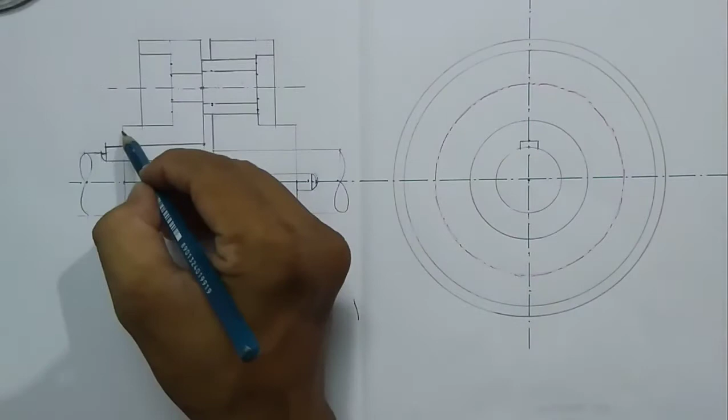Next thing, you have to fillet it here at 4 points. So you can see a small fillet at these 4 points. All fillet and round radii were given as 2 mm. All unmentioned fillet and round radii, 2 mm we have to choose.

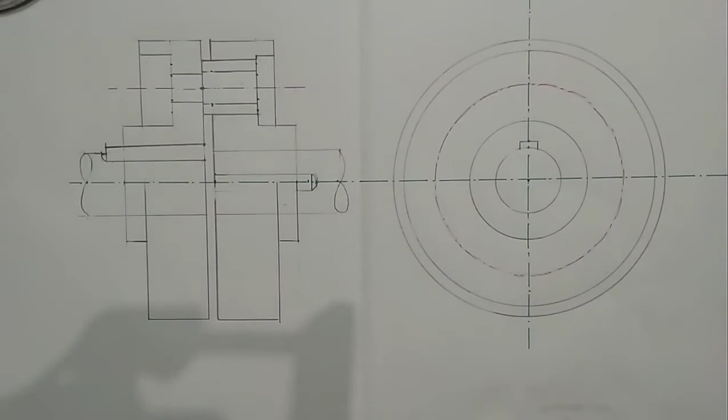So you choose a 4 mm diameter circle, so the radius will be 2 mm. This circle, sorry, this one.

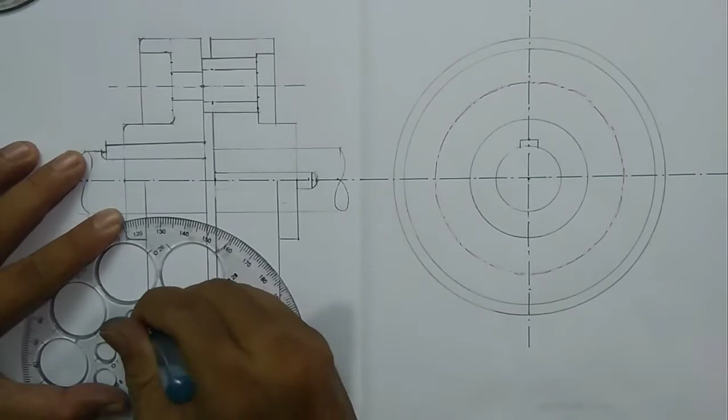Similarly at the bottom. Like this in this flange too.

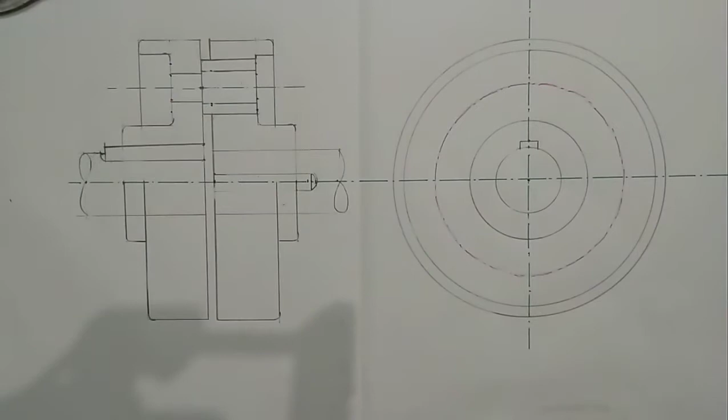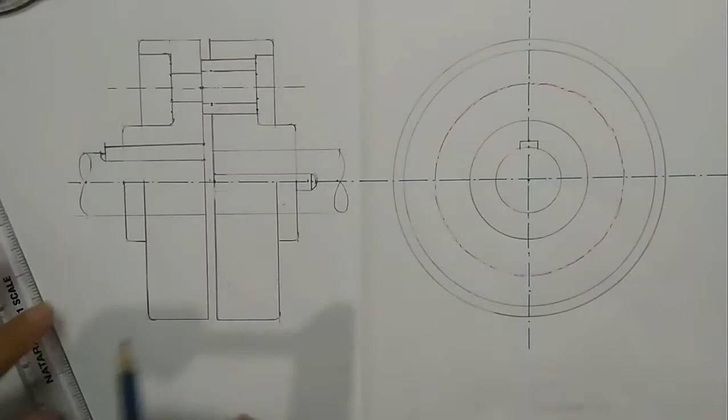So next one is you have to draw this bush at 4 points: here, another one here, another one at the middle front, and another one at the back. So now I am going to draw this center line here. You can see this pitch circle diameter is 90. So from this to this point you will get 45. So I am going to draw the center line 45 mm below the main center line.

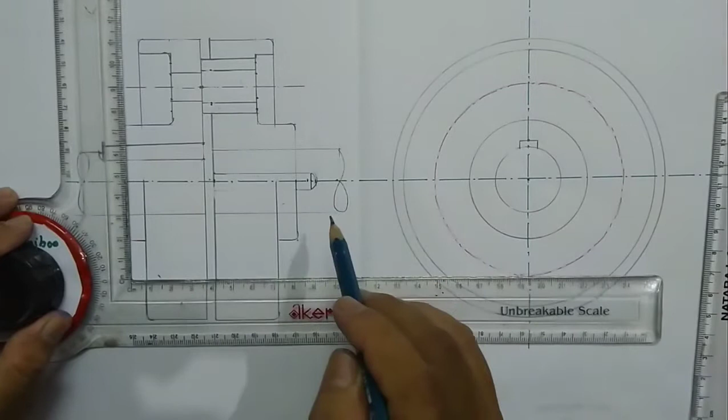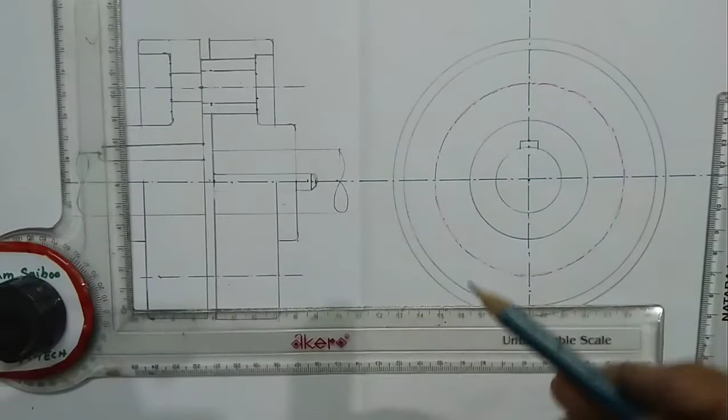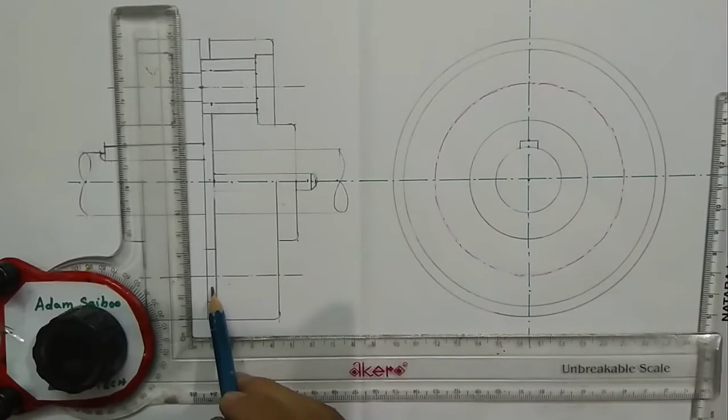You can see the outer diameter of the bush is 25. This distance is 25 mm. So 12.5, 12.5. From here I am drawing the line 12.5 and here 25. So this one is the second bush. Only this portion will be visible because we are not sectioning at the bottom.

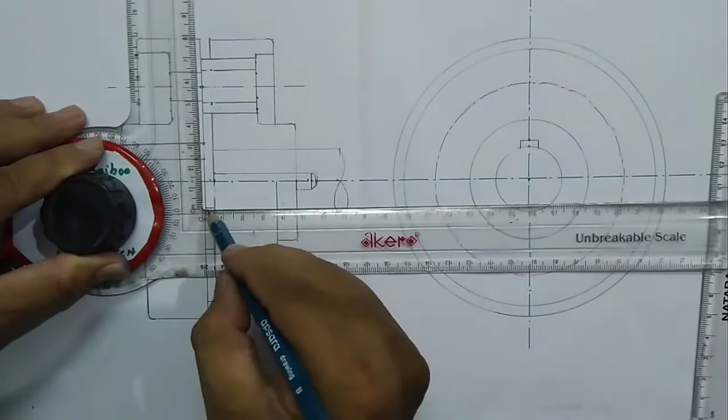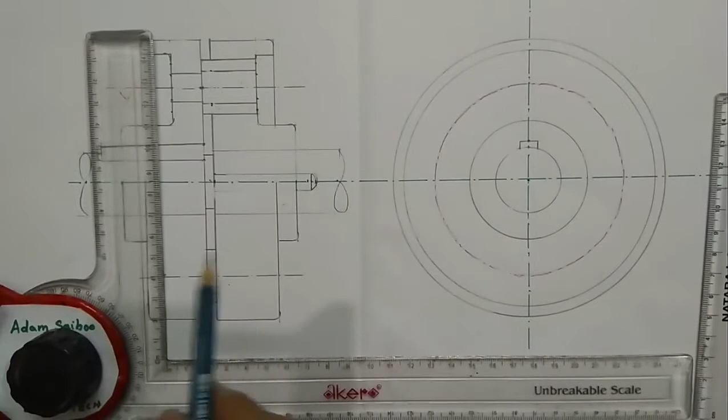Similarly, at the middle, from the center line, draw a small line to fill the gap, 4 mm gap, 25. So this distance will be 12.5. This distance will be 12.5. Another bush, these 3 bushes, one more bush will come at the back, so no need to draw that, it will coincide here. Okay.

The next part will be our hexagonal bolt and nut. This one is a stepped bolt and nut we have to draw. So before drawing this, you have to draw the side view, then only we can draw this bolt. So for this side view we will come here.

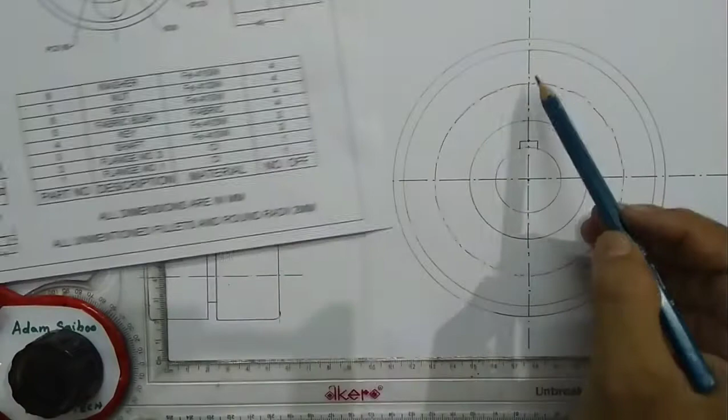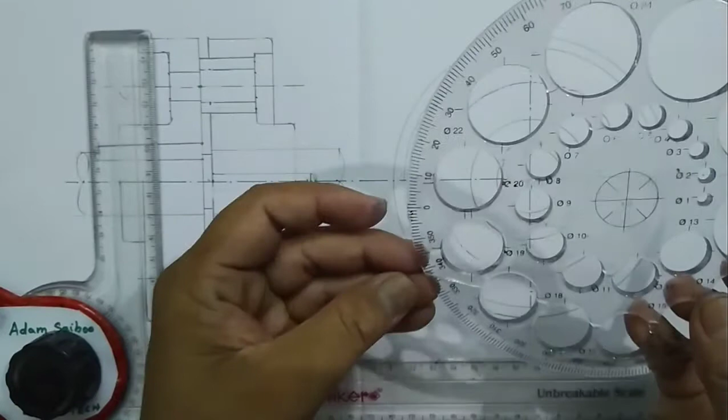So you can see this bolt size was given from this to this point as 21.10. So choose a circle 21.10. You cannot get this diameter circle, so I am choosing a 22 mm diameter circle, approximately equal to 21.10. Draw this circle very light, and at this point also.

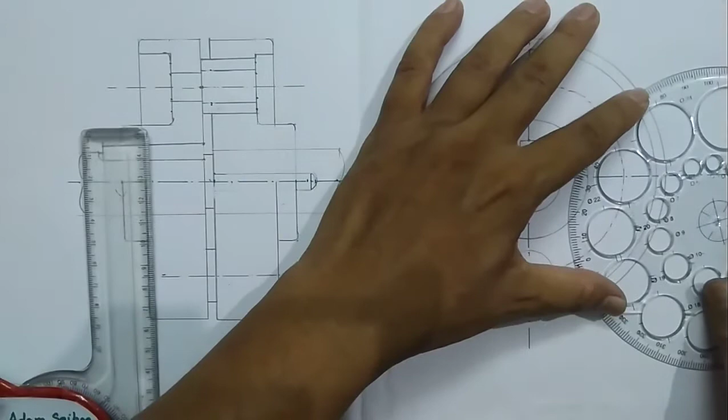So we will get 4 bolts and nuts here. As I am drawing the left side view, we can see the bolt. From here I can see the bolt.

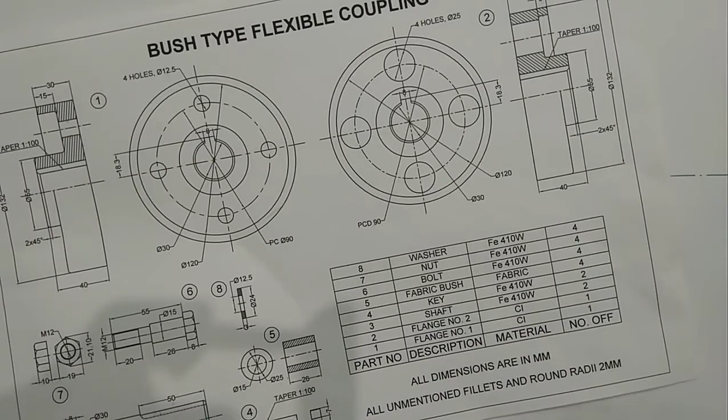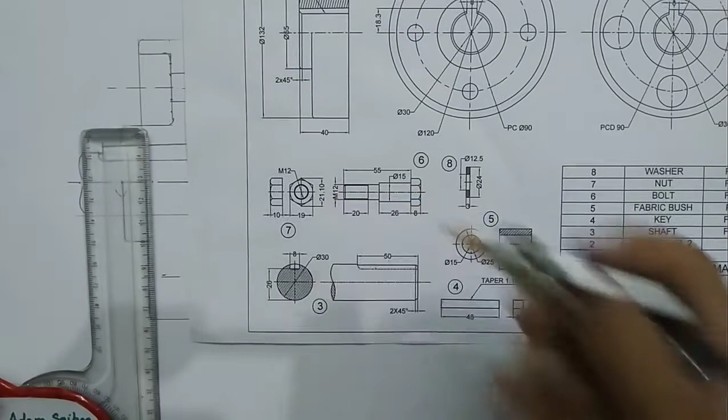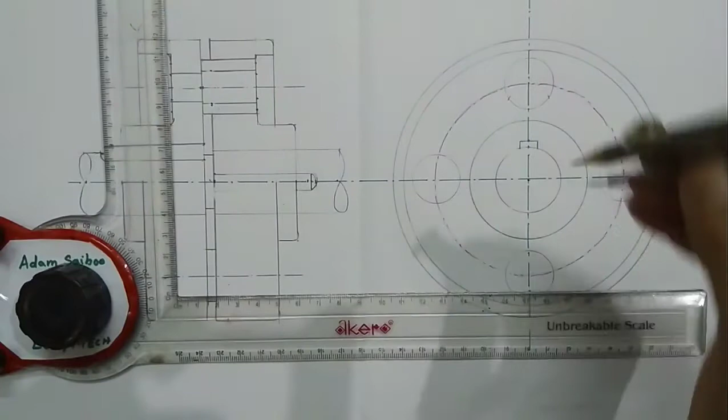So the next thing is I have to draw an arc of size half of this size, 21.10. Half of it is approximately 10.5. So measure 10.5 and cut an arc here. So I am taking 10.5, approximately half of the value of 21.10. Draw the hexagon.

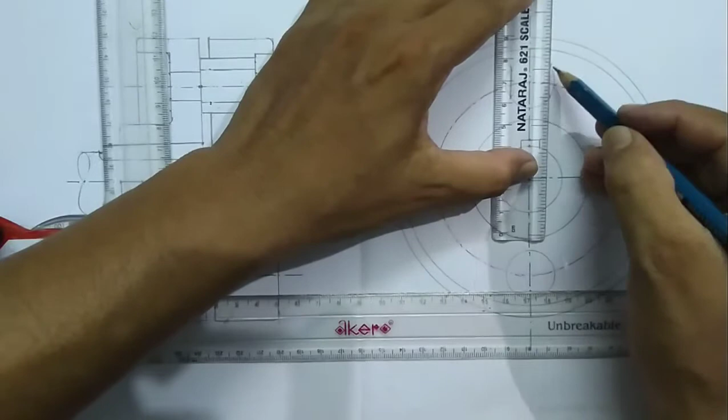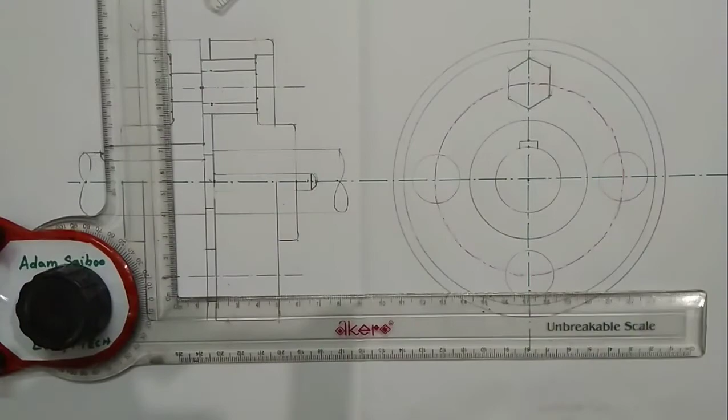Then here is the outer circle, because this one is a construction circle. For drawing the hexagon only, I have drawn this circle. Then draw another circle inside the hexagon.

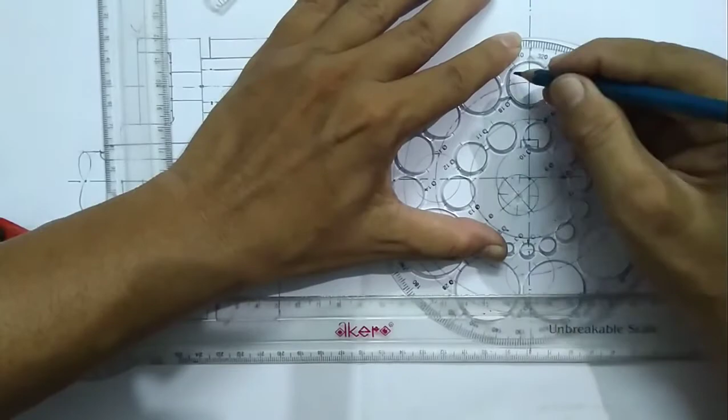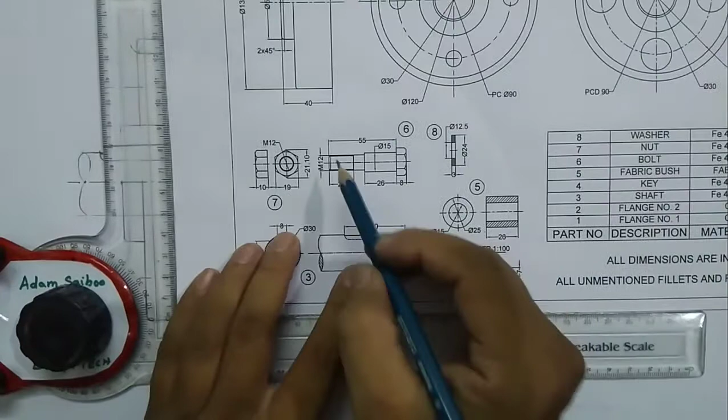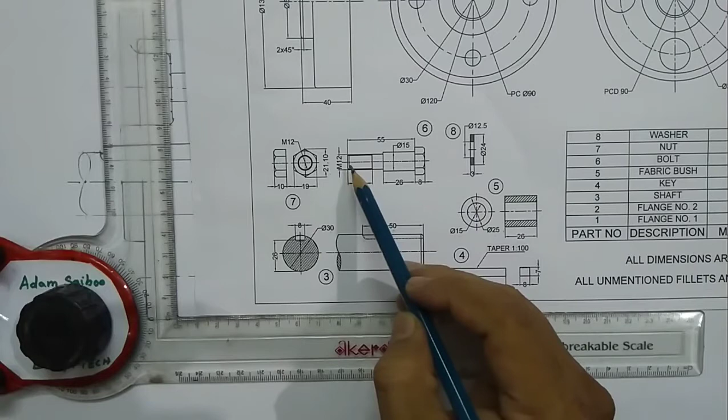Next thing is this hole I have to draw. Actually this bolt will protrude outside the nut, so I have to draw this bolt end. This distance is 12 mm, and as this one is a threaded portion and an external thread, we will get 2 circles. Major circle diameter is 12, minor circle diameter is 0.9d, which means 1.2 we have to reduce. From 12 mm you subtract 1.2, you will get around 10.8.

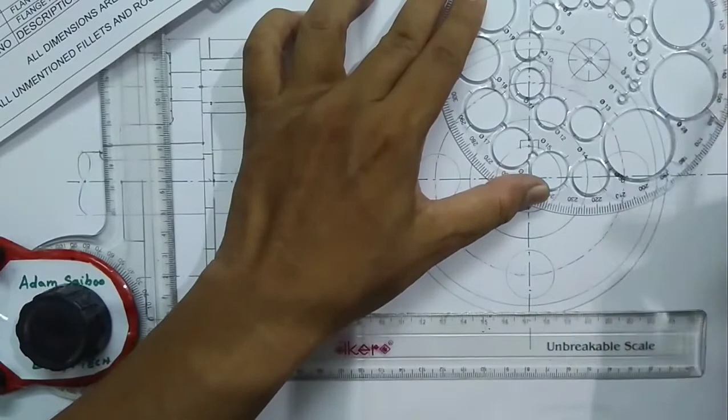So choose a 12 mm diameter circle, and then another circle which indicates the minor diameter. 3/4 of the circle you have to draw.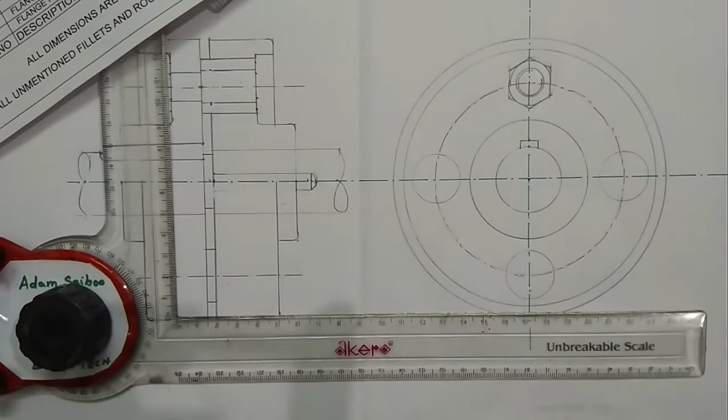If I choose an 11 mm circle, then these two things will be very close and you cannot identify them. So I am choosing a 10 mm diameter circle to draw this. The next one, in this same manner, you have to draw these 3 points here.

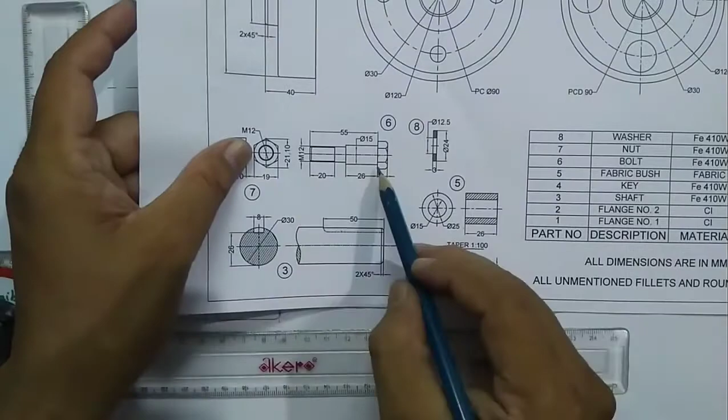Another thing, I am going to attach this bolt over here, so this point will match here. So you can see the bolt head thickness was given 8 mm, and this distance 26, this dimension is 15 mm. Actually the inner diameter of the bush is 15 mm, and this distance is also 26 mm for the bush. So this is 26 mm. So first we'll draw this head.

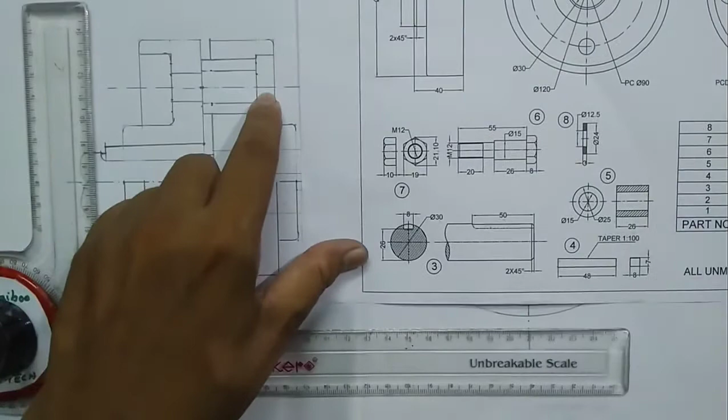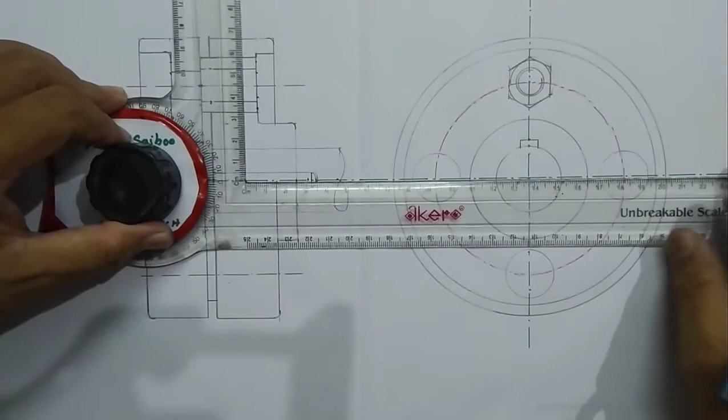I'm going to draw this head here. The head is 8 mm thickness. So measure 8 mm. This distance is equal to 8 mm, and you have to project 4 lines. From this point I am projecting a line. From this point I am projecting. And from this point also I have marked a point here, and from this point you have to mark a point here. Then draw lines. So from these 4 points I have projected lines and drawn these 4 lines.

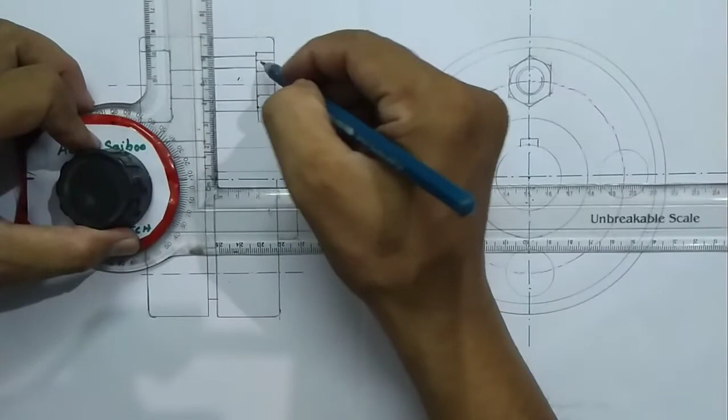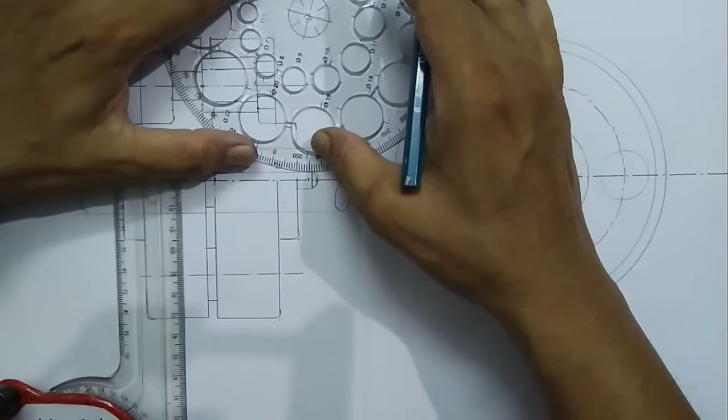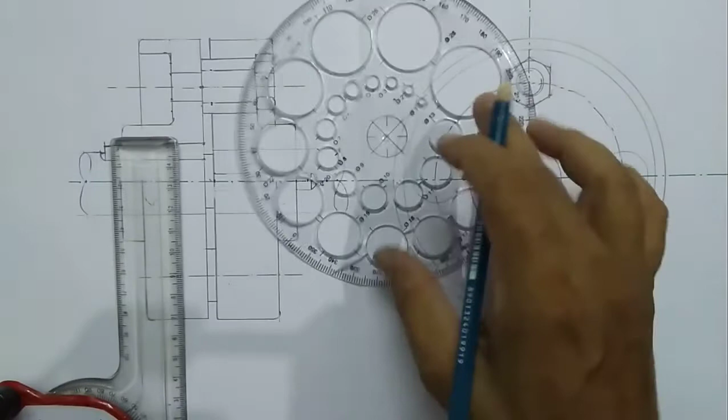Due to chamfering the bolt at one end, you will get 3 arcs here. So draw these 3 arcs. You can choose some, I think an 8 mm diameter circle will be better. For the middle circle, choose some bigger diameter. I am taking a 20 mm diameter circle.

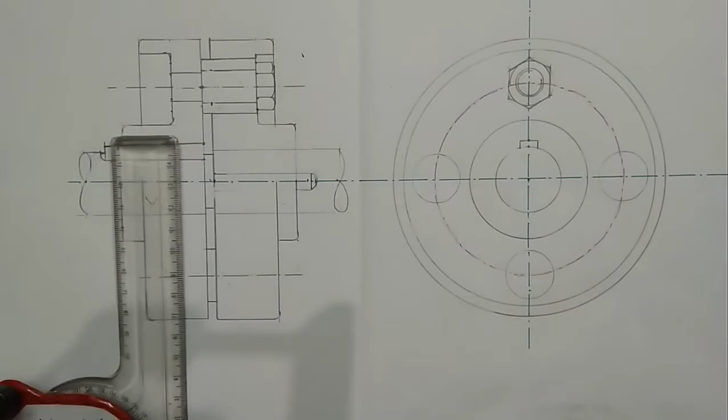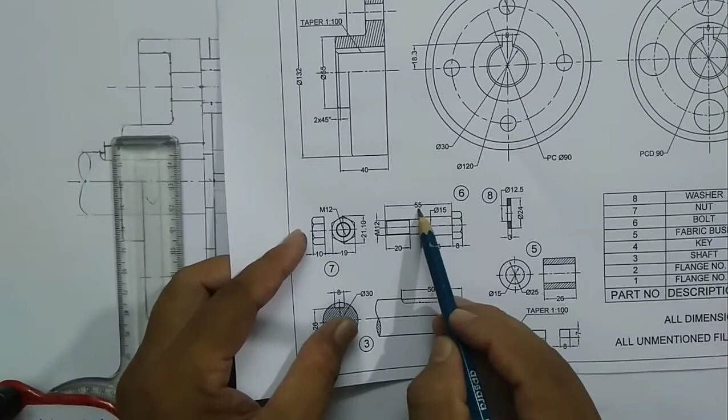Okay, I have drawn the bolt head. Then this portion is already drawn here. From this to this distance is 26 mm, and this distance was 15 mm. Then this portion I have to draw. The total length is 55 mm. From this point to this end, the length is 55 mm. So you mark 55 mm. So from here to here the length is 55 mm.

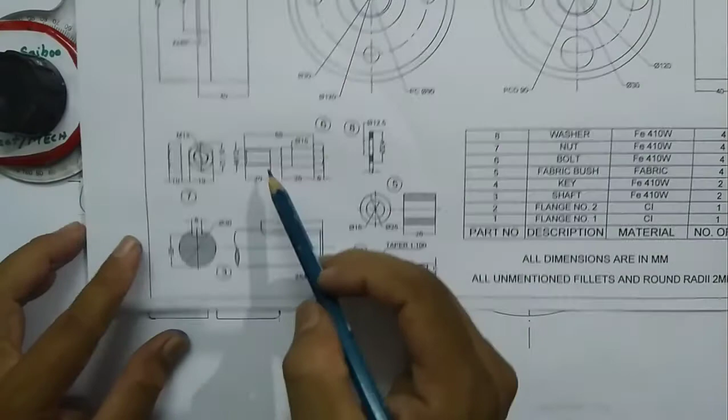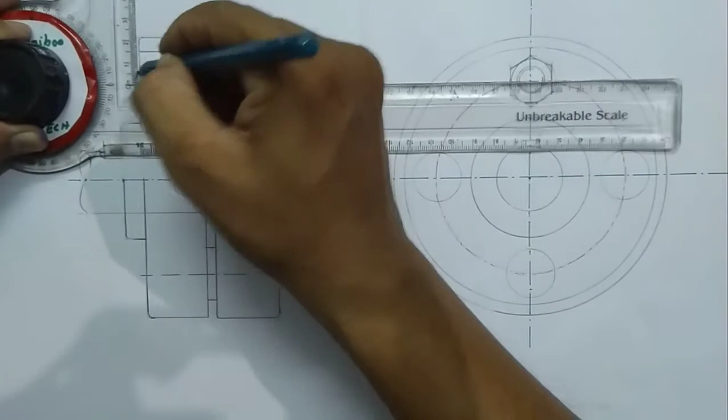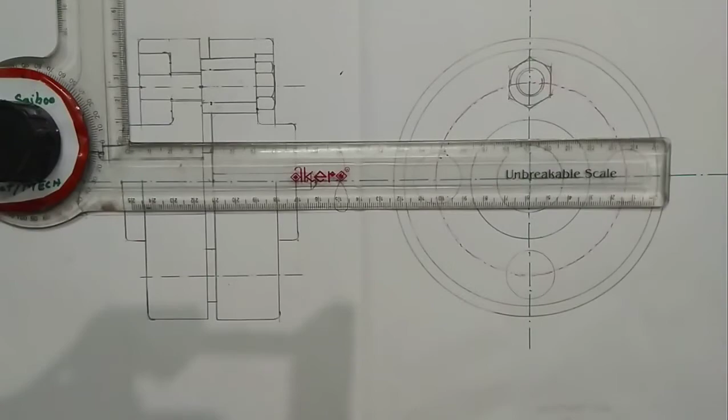And the diameter is 12 mm. This one 6 mm I am taking and drawing a line. So this distance is 12, 6, 6. So the threaded portion length was given 20 mm. Here you can see this distance is 20 mm. You mark 20 mm. On this point I am marking 20 mm.

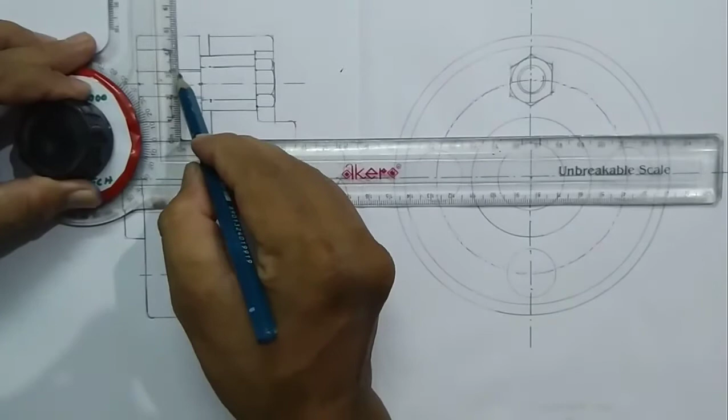So the thread minor diameter I can take as 11, because 12 mm if you subtract 1.2 you will get approximately 10.8. So you draw a line just below this major diameter.

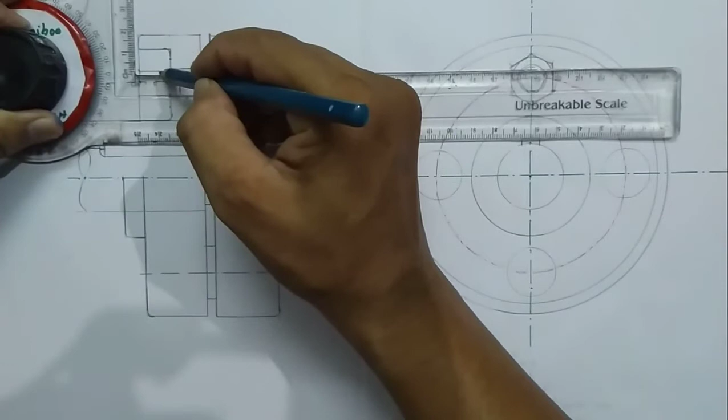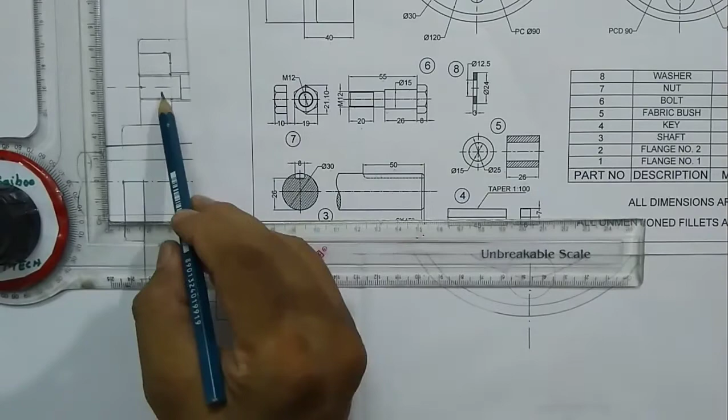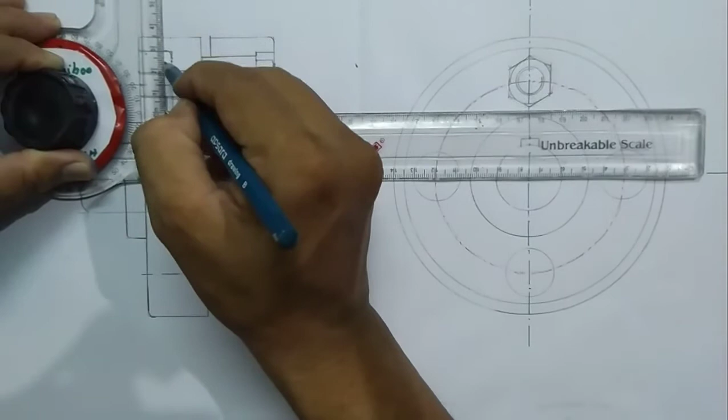So next I am going to attach this nut here. This nut length was given 10 mm. So before that we have to attach the washer. Here the washer diameter was given. Outer diameter of the washer was 24 and the thickness of the washer is 3 mm. So 24, 3. 24, half of that is 12. Three mm. So this one is the washer. This distance is 3 mm and from here to here the length is 24.

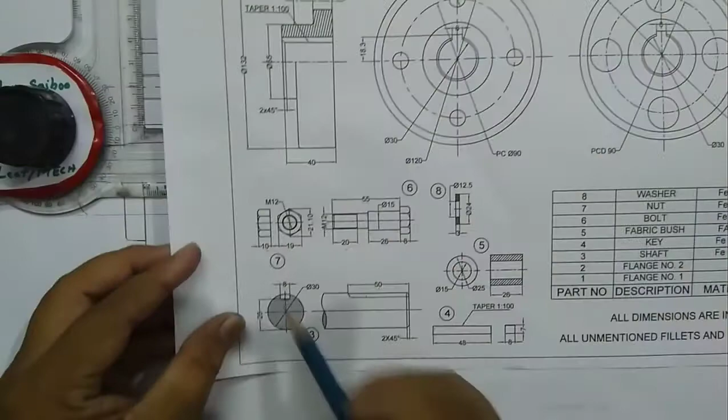Next I am going to attach this nut. This nut thickness was 10 mm. So from here, 10 mm offset, draw a rough line. As bolt and nut are of the same size, I can project lines from here.

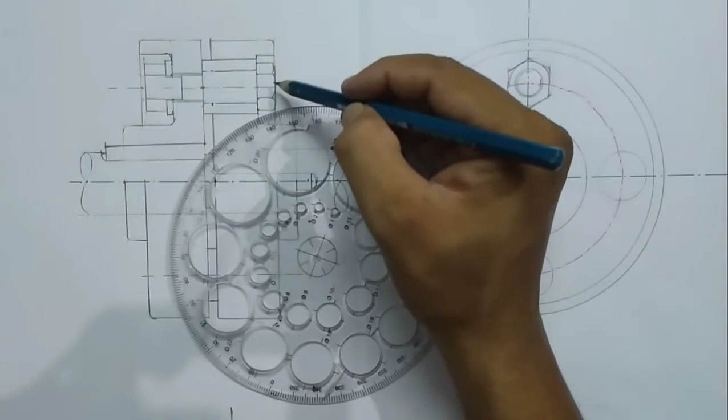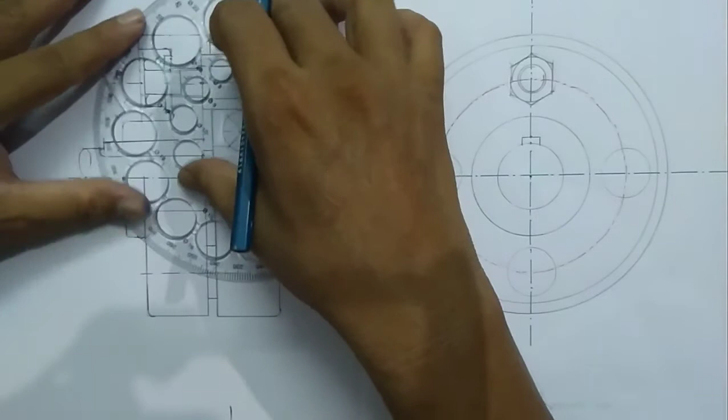For the nut you can see the left end is chamfered. So in the same manner you drew the bolt, in the same manner you draw here. I am using a 6 mm diameter circle for this arc, and 19 mm diameter for the middle one.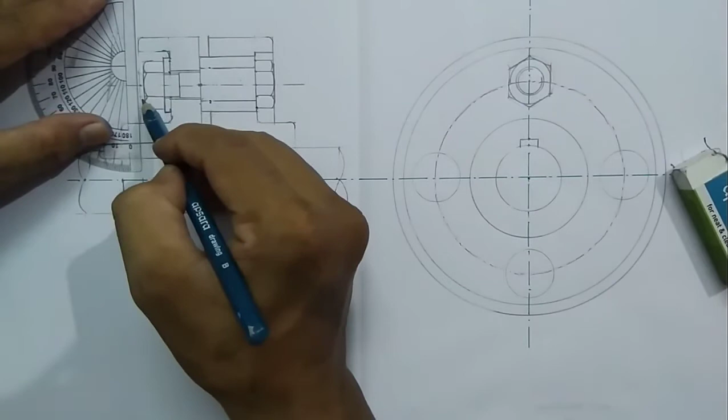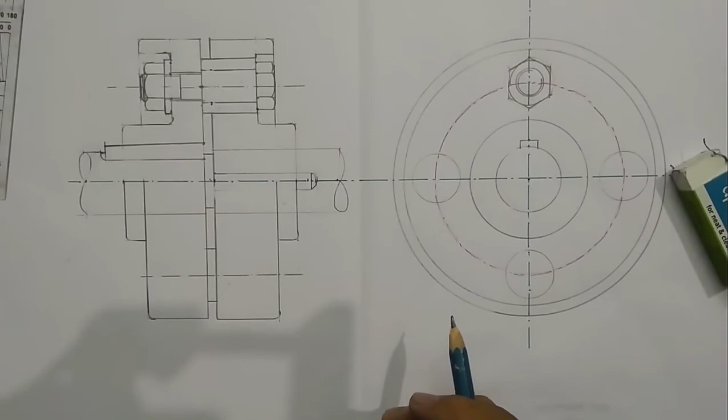Here you can see the small portion of the bolt end. The end will be chamfered 45 degrees. In the side view, you can see the washer here. The washer is of diameter 24. So you have to draw a circle of diameter 24.